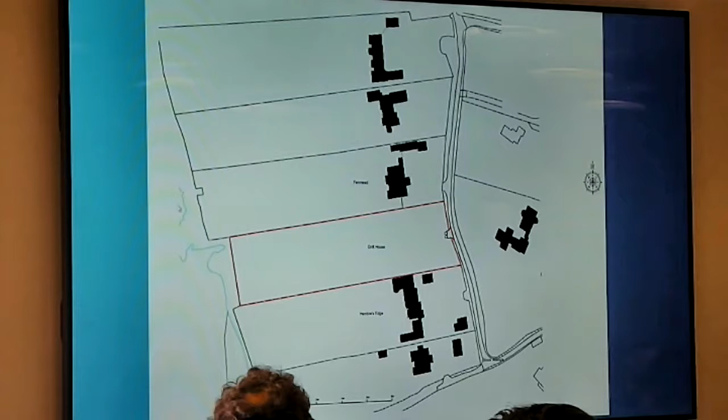Proposed is a replacement dwelling. A dwelling until recently has stood on the site of Drift House. It was demolished last year, and the proposal comprises a large detached dwelling.

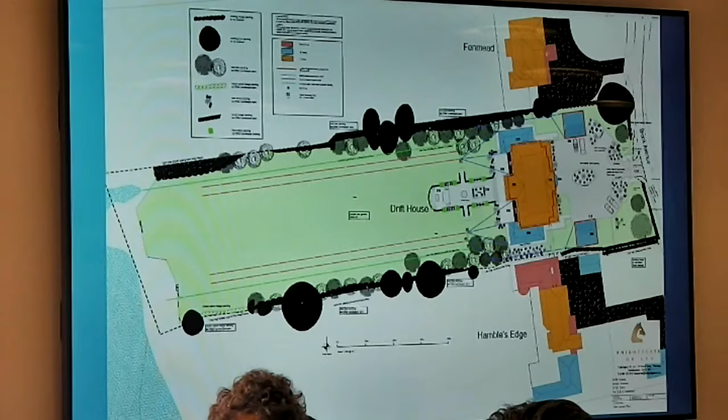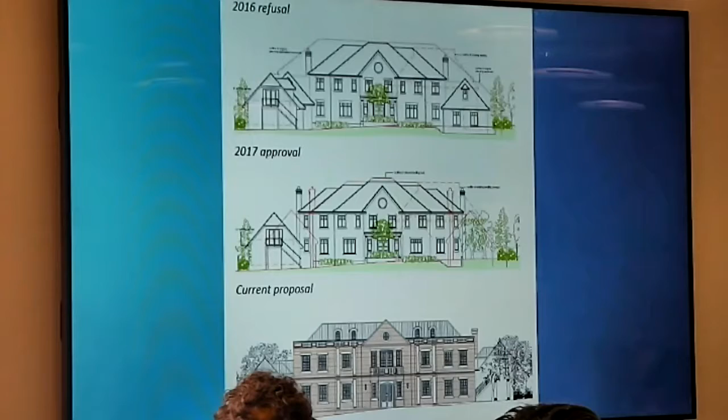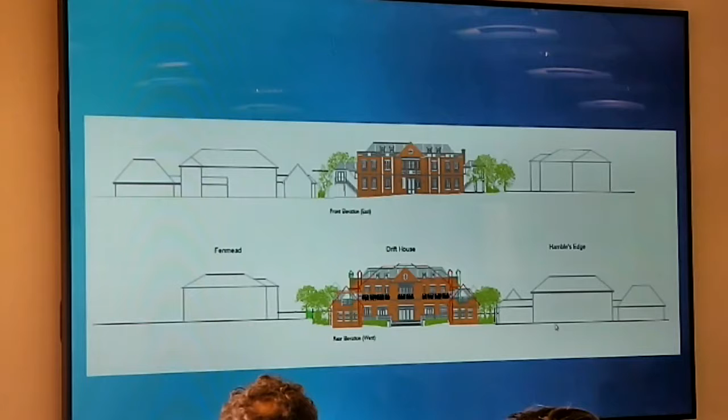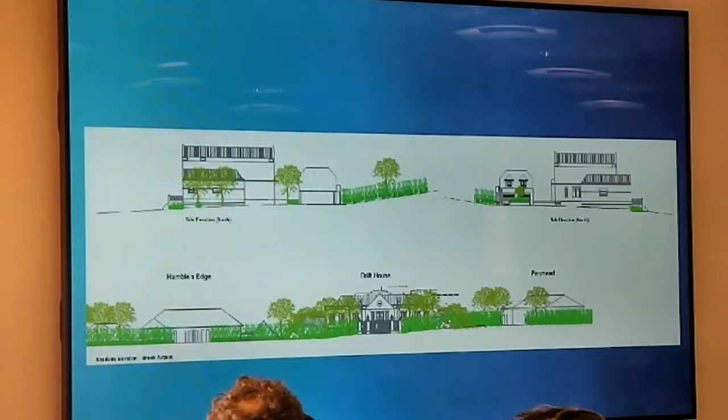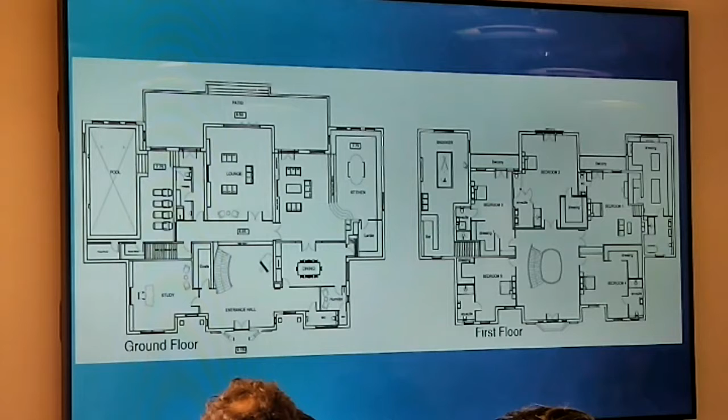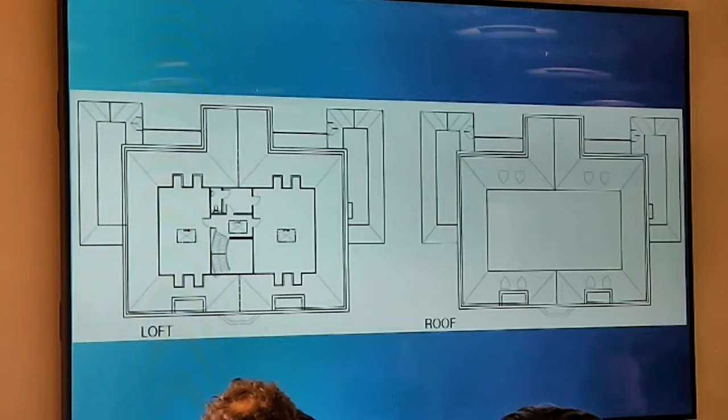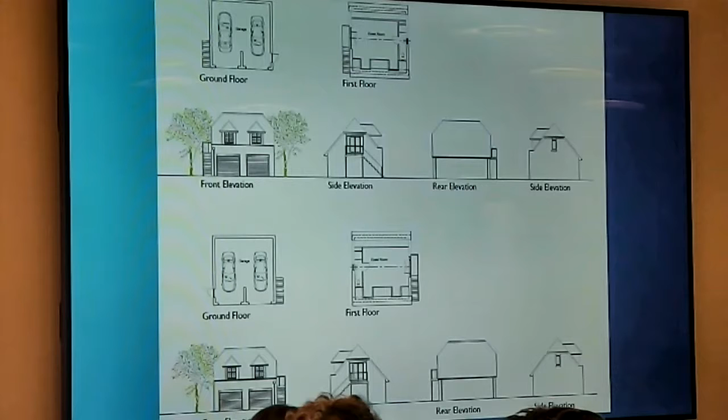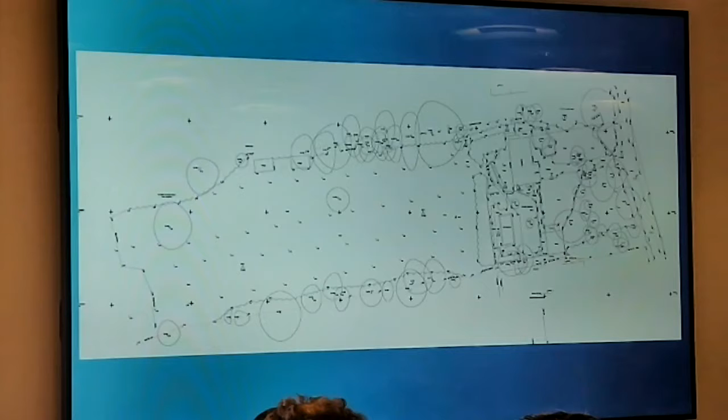This drawing is a topographic survey of the site as it was before any development took place. It's really just for reference and to illustrate the arrangement as was previously with the dwelling that was recently demolished in this part of the site here, and then an uncovered swimming pool and terrace in the southern part of the site here.

An updated topographic survey has been carried out by the applicant, and that's shown on the screen here. So as it is at the moment, the site is as you see here. The slabs for the two garages have been constructed already, enjoying the benefit of the permission that was previously granted last year. And then you'll see reference in the officer's report to a raised table of material, which is approximately in this position here.

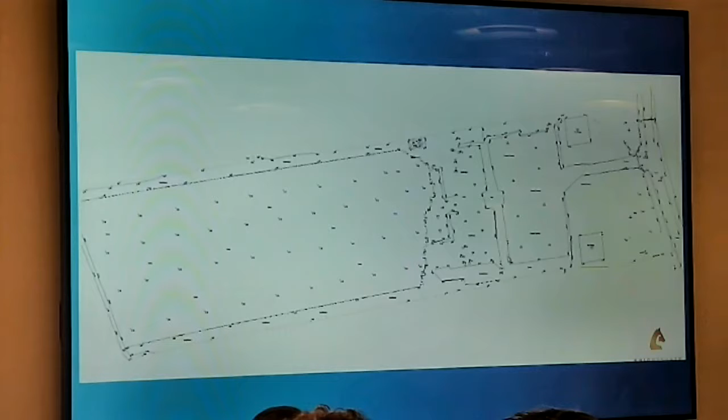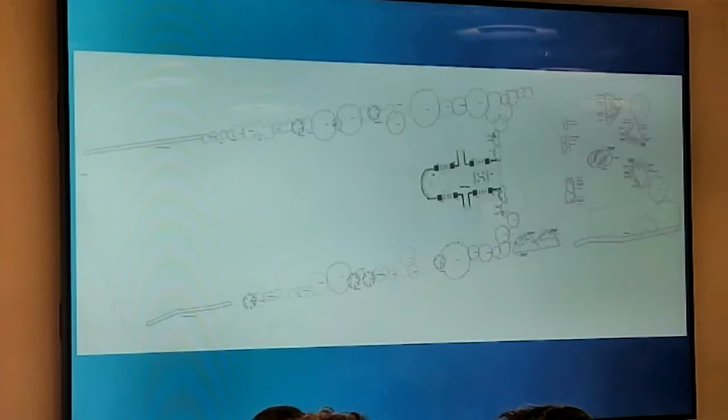This drawing shows the outline details of the landscaping scheme that is proposed, as well as a vast amount of detail about the ornamental species that would be planted around the house. There is detail on the mature tree species that would be planted along the boundaries either side, so north and south.

And then, Chairman, if I just take you through some photographs, I'm aware, of course, that members are probably already very familiar with this site, with the applications that have previously been before you, but just to refresh your memories and to provide you with some updated photographs also.